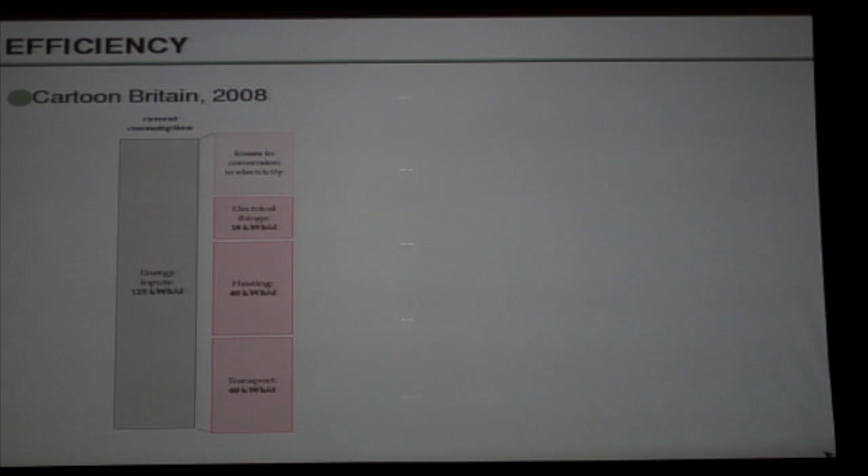In Britain, we need heating because we have cold winters, reasonably cold winters, and we have crappy buildings. Here's my house, and it loses heat at a rate that is the product of the leakiness of the building and the temperature difference between the inside and the outside.

That heat loss is made up by power, and the power required to make up the heat loss is the heat loss divided by the efficiency with which you can create heat. The standard way of heating buildings in Britain is to set fire to natural gas, and natural gas boilers are 90% efficient at turning chemical energy into heat. You might think that sounds good, but it's actually lousy, and I'll talk about that soon.

So we can attack the power consumption by attacking any of these three terms on the right-hand side in colour. You can reduce the temperature difference between the inside and the outside of your building by this amazing technology called the thermostat. You grasp it, you rotate it to the left, and your energy consumption goes down.

Rotate it 1 degree and you'll save 10%. Turn it down 5 degrees in winter and you'll save 50% off your heating consumption. I've done it, it works, and some people call it a lifestyle change.

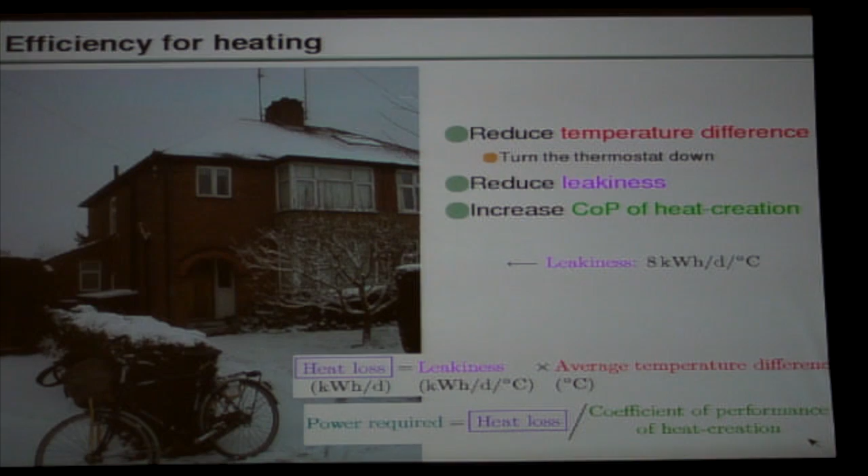Second, you can get the fluff men in to reduce the leakiness. Here's the fluff going into the walls, extra fluff in the roof, and you can get a new front door to reduce the leakage out of the front of the house.

These sort of minor modifications will give you a saving of about 25% in the leakiness of a typical crappy British house. And that's good, that's worth having, it's economic, but it's not the sort of radical transformation we're hoping for if we're in the Amory Lovins camp of saying technology can give tenfold improvements.

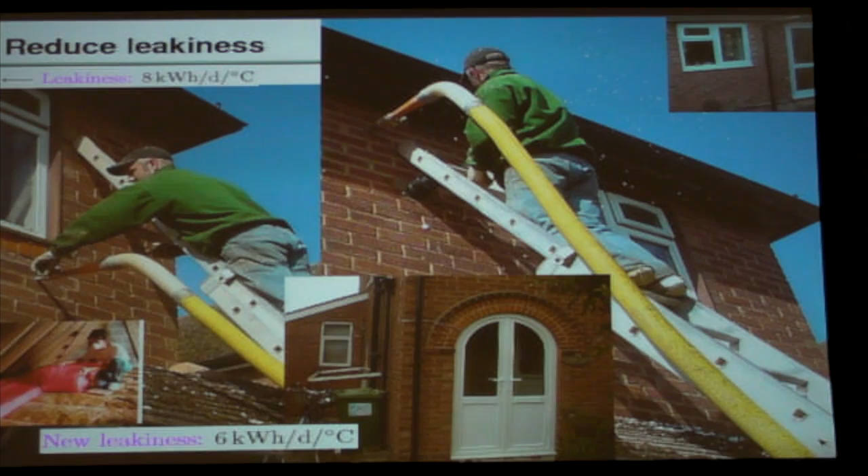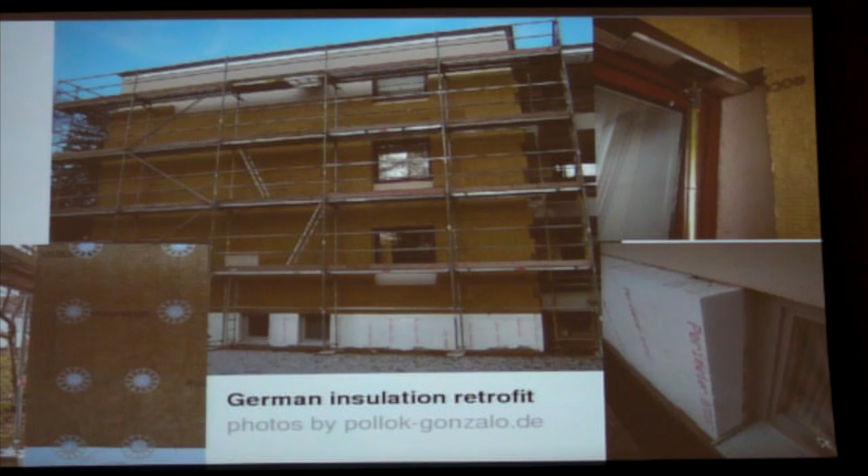So what can we add to this 25% improvement? Well, we could go further with the insulation and really improve the performance. Again, admiring the Germans, the traditional German practice with a crappy building is to put 12 or even 20 centimeters of rock wool on the outside to give it a really nice, warm, fluffy jacket to keep it warm in the winter. But there's another option, which is to attack the efficiency of heat creation.

The boiler that burns gas is 90% efficient, but we can do much better, because what we're after is low-grade, low-temperature heat, and that has very small value, and it can be delivered in a much more efficient way than setting fire to high-grade chemical energy.

This technology is called a heat pump. Probably you already know about it, but let me tell you anyway. It's a back-to-front refrigerator. Take your refrigerator—it's making the inside of the fridge cold. How's it doing that? Well, it's doing it with some pump that moves the heat from the inside to the back.

Reach around the back of the fridge and there's a grill and it's warm, yeah? So now, you take your fridge, you open the door, put it in the kitchen window, and now the open door of the fridge is opening the inside to the garden. So the inside of the fridge is in the garden, you keep it running, and now it's cooling down the garden, and the grill is still warming up the kitchen. And that's how a heat pump works.

So heat pumps are back-to-front refrigerators. They're also identical to air conditioners, just back-to-front air conditioners. It's exactly the same technology.

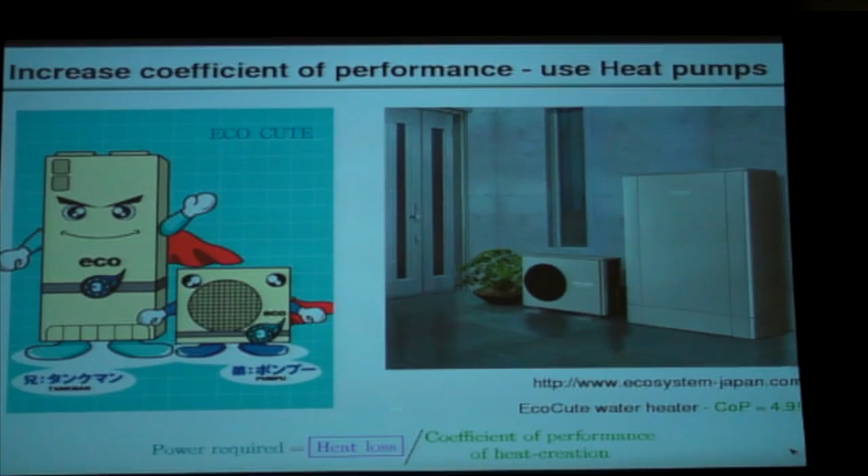In Japan, they've recognized the importance of heat pumps and the efficiency of heat pumps for several years, indeed decades. They've had an efficiency drive that says all heat pumps must be better than average, and the result is fantastic. Here's Pumpu and Tankman, and they've got amazing gloves and capes and eyes, the lot. They're wonderful. Pumpu's coefficient of performance is 4.9 according to their website.

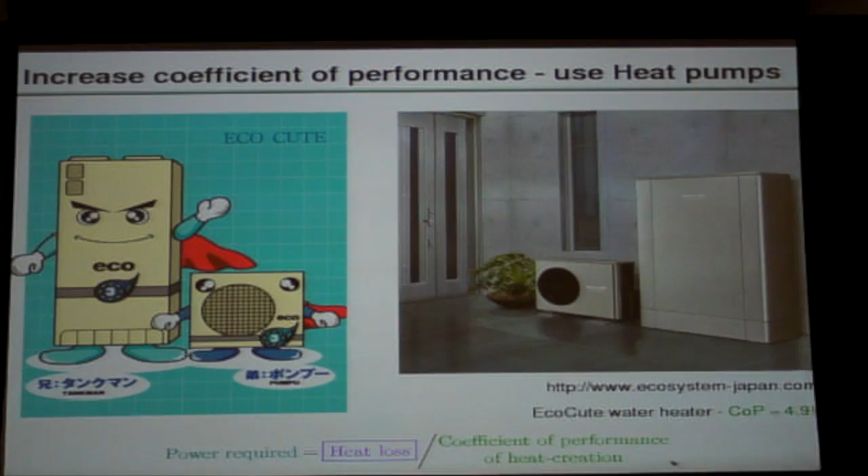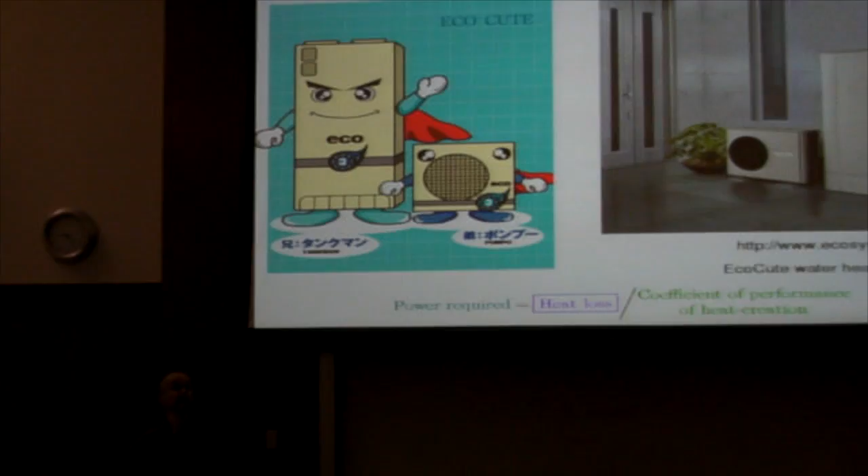So he's not 90% efficient, but 490% efficient. You give him 1 kilowatt hour of electrical energy, and he delivers 4.9 kilowatt hours of heat into the kitchen and into Tankman. So he delivers hot air and hot water.

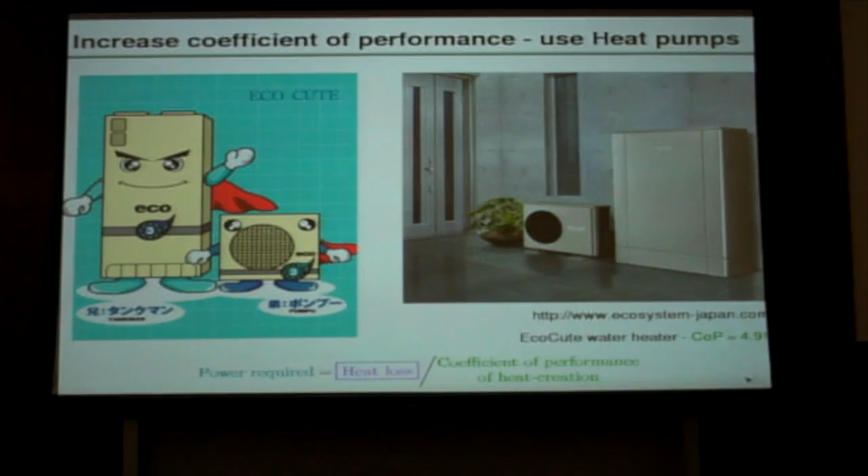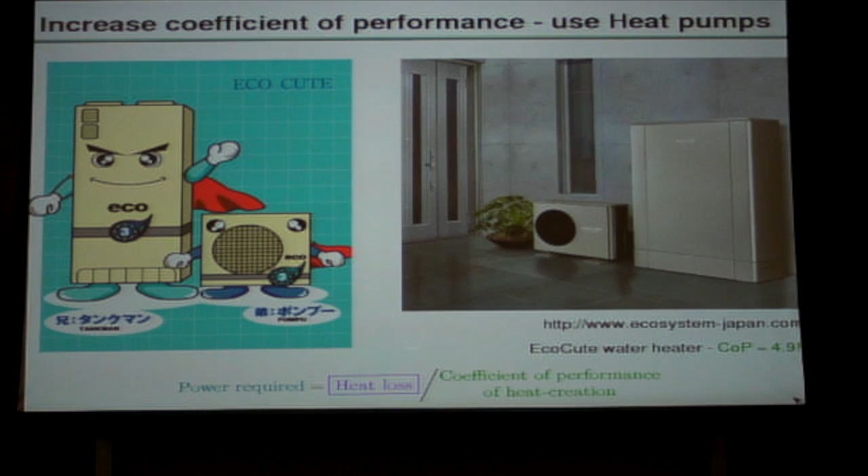Now, you can't trust everything you read on websites, but studies by the German Energy Institute show coefficients of performance between 3 and 4. So 300% efficiency is indeed possible, roughly 3 or perhaps even 4 times better than the standard way of providing heating.

So the suggestion is, let's go for heat pumps as a major way of delivering heat if people want hot water in homes and hot air at some times of year. These can either be ground source heat pumps that suck heat out of the ground, which originally came from sunshine. People call this geothermal power sometimes, but that's not true - it's not geothermal energy, it's energy that came from the sun.

And there are air source heat pumps, of which Pumpu is an example, which pump the heat from the air in your garden directly into the house.

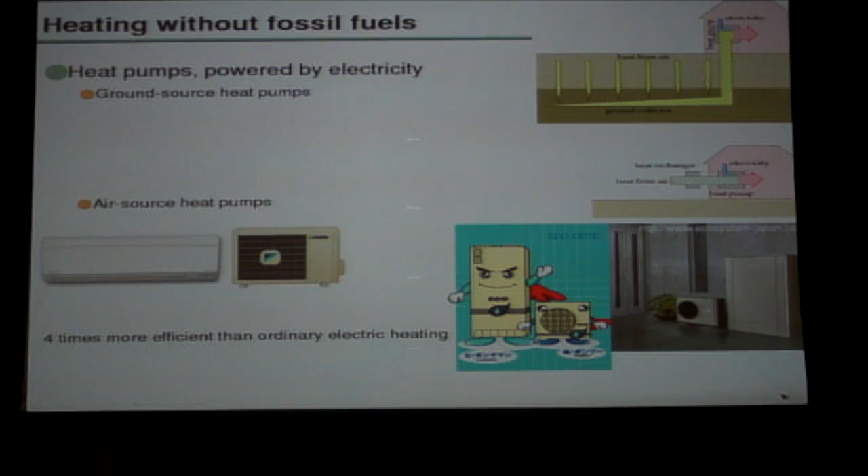So we can make things more efficient. We can make transport more efficient. We can make heating more efficient. And there's one more technology I'd like to emphasize in addition to electric transport and electric heating - a technology called reading your meters.

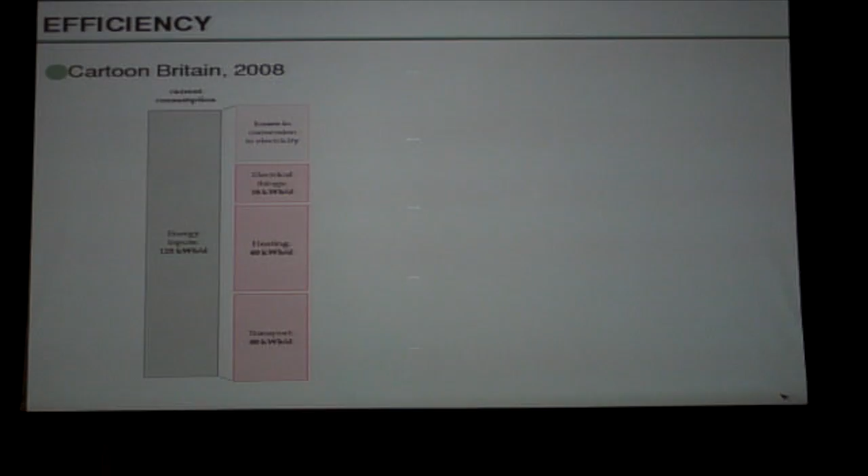If we can get people to read their meters and understand what their meter reading means, I think we can get enormous savings, because people waste a lot of energy, and it's quite easy to change lifestyle to save some of that energy.

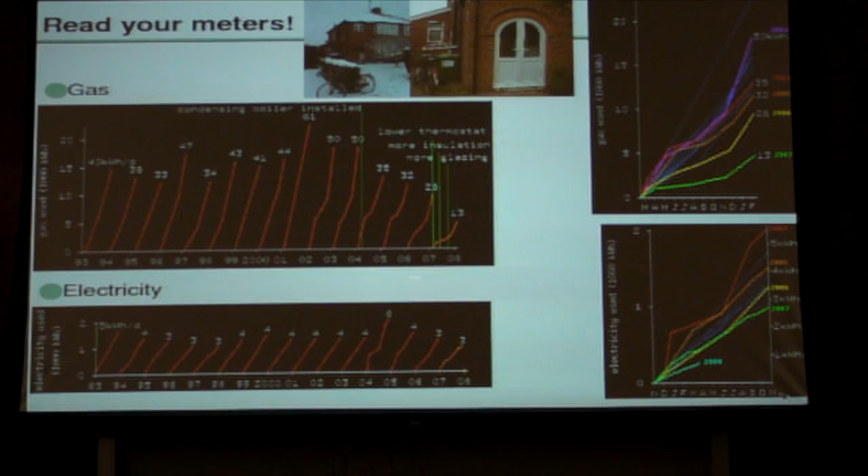I found this out because a friend asked me, when I was writing my book on sustainable energy, how much energy I use. I was embarrassed that I didn't actually know my domestic energy consumption. I thought of myself as a green person, but for 15 years I'd just been piling up the meter readings without looking at them. So I started reading the meter every week.

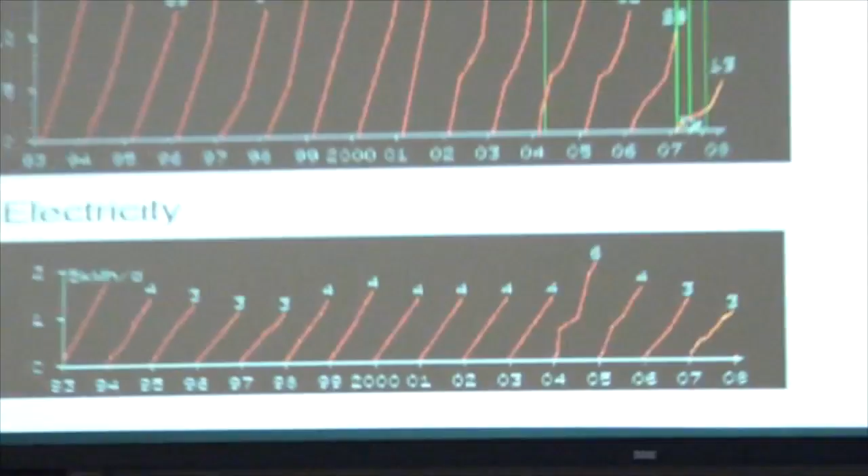The effect was that during that year of reading the meter every week, my gas consumption went down from 40 kilowatt hours per day on average to 13 kilowatt hours per day. Similarly, my electricity consumption went down from 4 kilowatt hours per day to 2 kilowatt hours per day. So I halved my electricity, and more than halved my gas consumption.

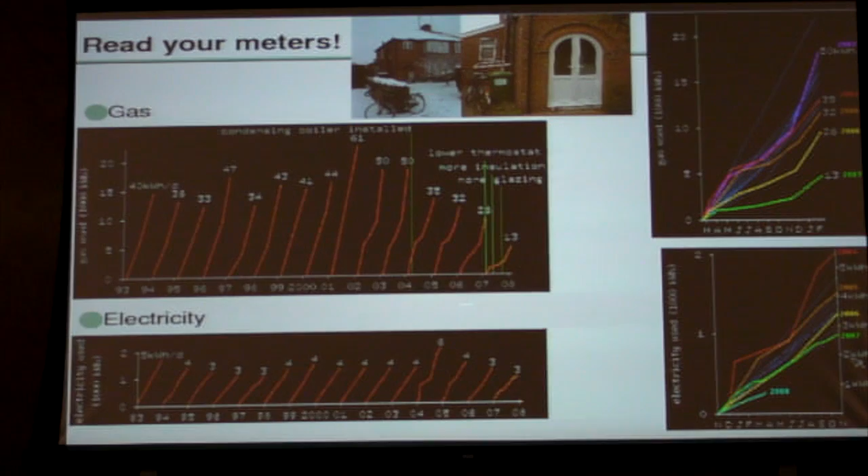Because once you start reading the meters, you become a scientist. You do experiments, try things out, and play the video game of trying to beat last week's high score.

Here's the graph I made of my electricity consumption before I tried being a little bit obsessive, and after. Before, I left the vampires on - not just the phone charger, but things like DVD players, stereos, home cinemas, and computer peripherals, modems and things like that, all on all the time. I tried switching them all off, and found a saving of about 45 watts, roughly 1 kilowatt hour per day, which is 1% of an average European's consumption - so it's worth having.

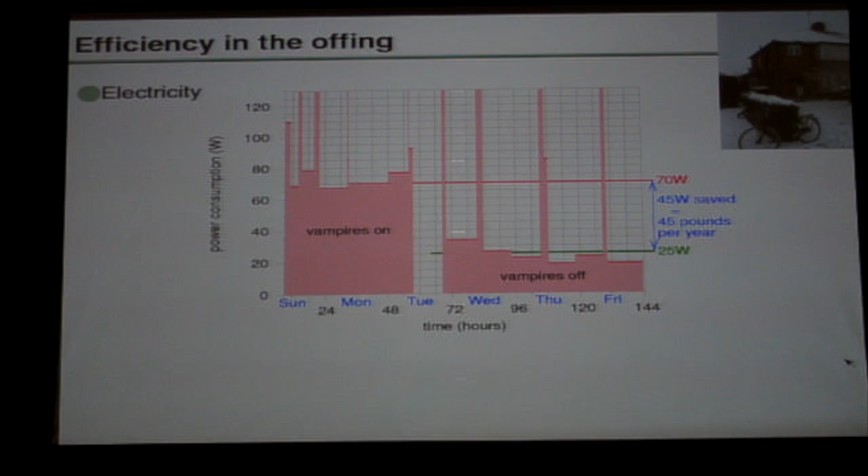And so that changed my life. Now when I've watched the DVD, I take the DVD out and switch off the DVD player. It's a simple lifestyle change. It doesn't cost much, and in fact it makes money - the total saving of this lifestyle change is £45 per year, which I can spend on an extra holiday in Lanzarote.

That brings us to Jevons paradox, which is something to bear in mind. Whenever we say technology can make things more efficient, well, yes, but if things get more efficient, maybe we'll end up using more of the stuff we are trying to save. So we need to bear that in mind and try to figure out if there is a solution.